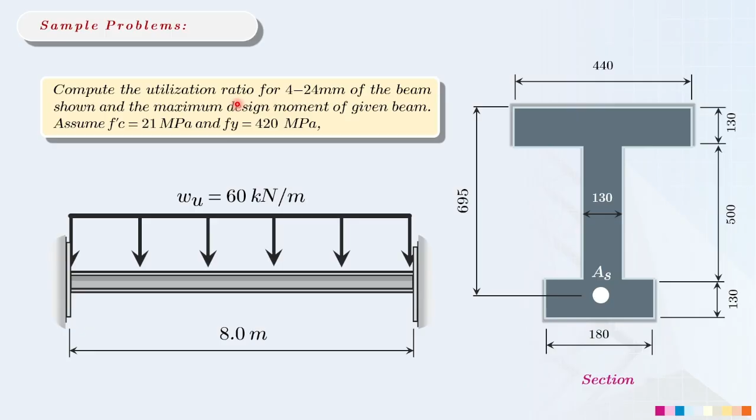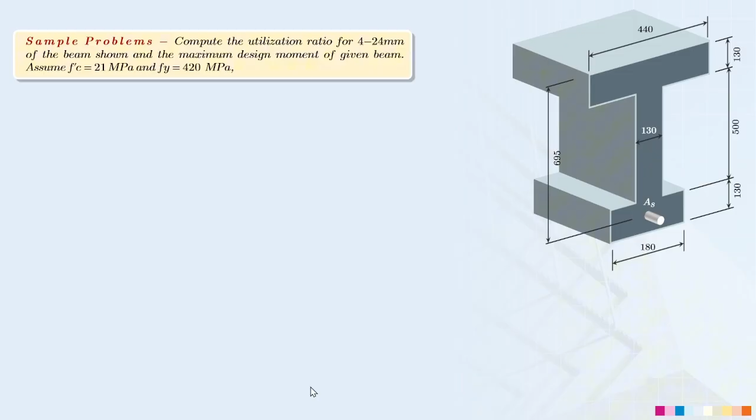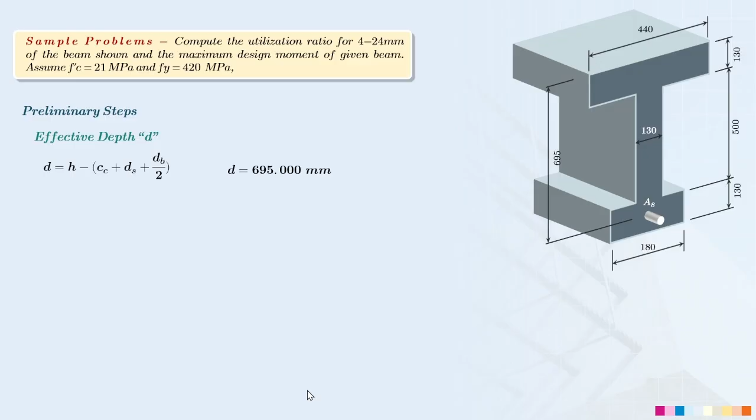So first, let's find the section capacity of our given beam. Our preliminary steps: we need to determine first the given effective depth. It's clearly stated in our sample problem that our effective depth is equal to 695 millimeters. However, the next preliminary step to consider is the area of the compression block.

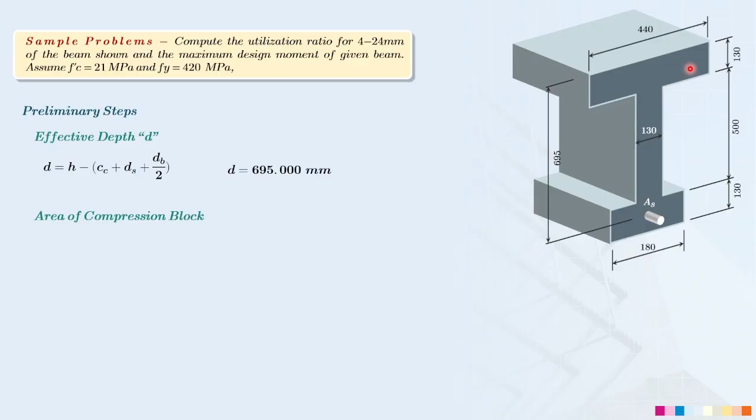Since our figure has an offset dimension, our section is composite in shape. It's possible that it falls under case number 1, where the value can be less than the 130 millimeter offset. If that happens, to get the area of the compression block, you simply use the area of a rectangle, which is base times height, or in our figure, 440 times A.

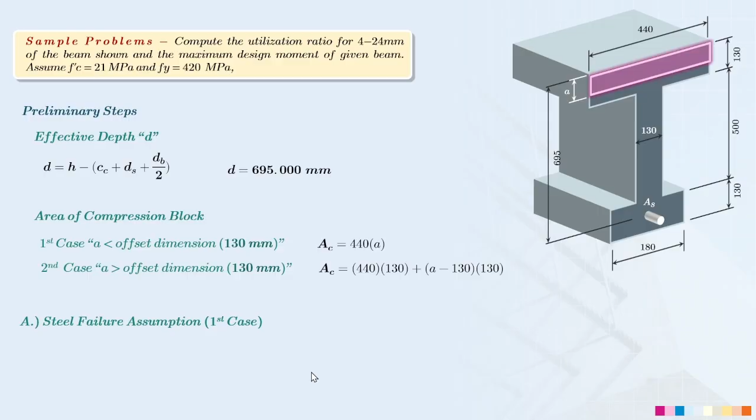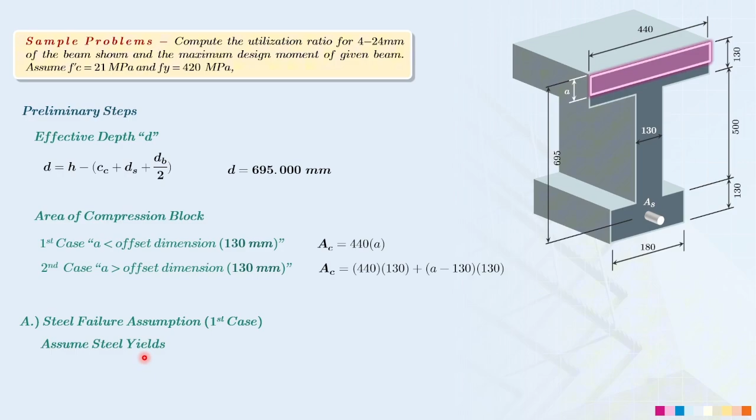So let's proceed with our first step, which is to determine the assumption for our steel failure. I will assume that my steel will yield, meaning my rebar strength can be greater than or equal to Fy. Our Fy here is 420 megapascal, so I will assume this value.

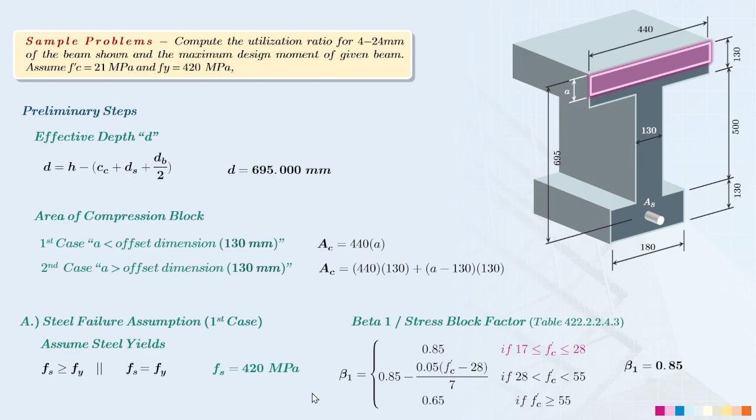For my beta 1, or the stress block factor, this is dependent on the value of our F'c. Our F'c here is 21 megapascal, so our beta 1 is equal to 0.85. Now we have our assumption for steel failure.

So in terms of my compression block, what I'll assume now is case number 1, meaning the a will not exceed 130 millimeters. So the next thing we need to do to incorporate our first case is...

I will now use our equilibrium compatibility, in general for our non-rectangular sections, and then substitute the area of compression block we derived for our first case, assuming that our steel will yield.

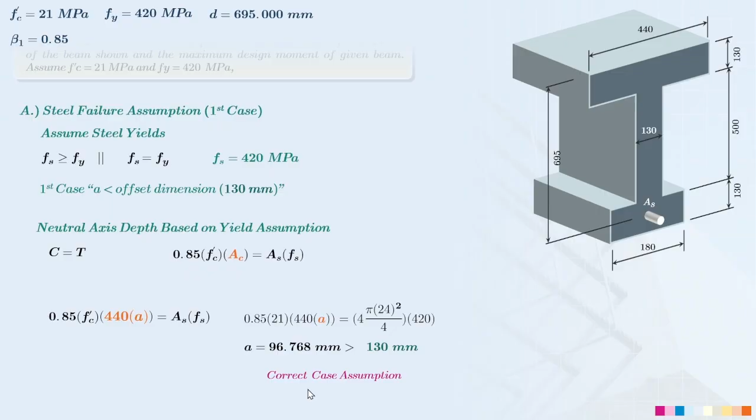So we substitute the other given values that we used here, and we need to solve first what is the value of A. So the value of A under this first case and under this first assumption is now equal to 96.768 millimeters. This means that our offset dimension of 130 millimeters is not exceeded.

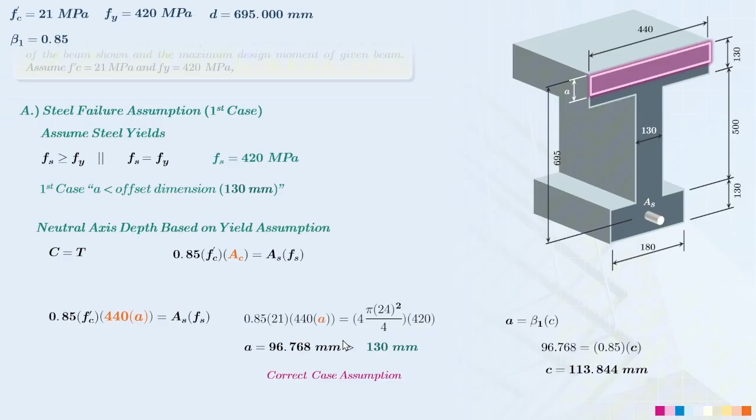This means our case assumption in terms of area of compression block is correct. But we can't finish yet because we need to confirm if our reinforcement will yield under this first assumption. So let's also find the value of the height of our compression stress block, which is equal to 113.844 millimeters, which means this is the correct case assumption.

But first, we need to determine if our value of C will yield as we assumed earlier. So let's do the second step, which is to check our assumption. Using this formula for our rebar strength, we substitute everything we got, especially the effective depth and the value of depth of compression block. So we get our rebar strength to be 3,062.893 megapascal, which is more than 420 megapascal.

This means that what we assumed in terms of rebar strength does yield. This means our assumption for the value of A is correct, which does not exceed our 130 mm. At the same time, our yielding strength or the rebar strength will yield. So what we did earlier was correct.

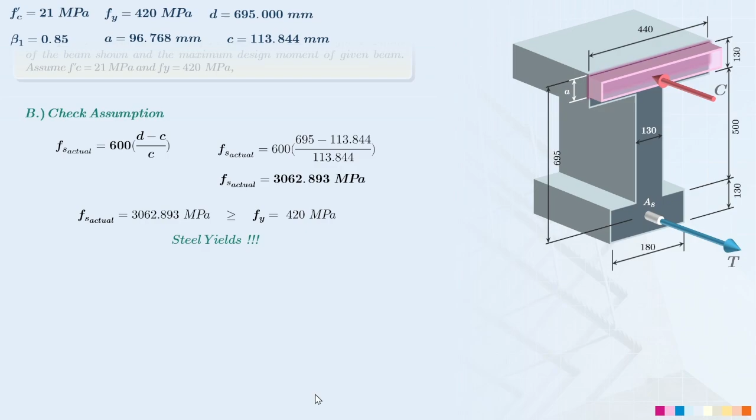So the next thing we do, if our conditions are correct, we can now determine the strength reduction factor. Under this condition, we compare our rebar strength between 1,000 and 400 megapascal. Since our rebar strength here is 3,062.893 megapascal, this is also greater than 1,000 megapascal, so our strength reduction factor is now equal to 0.9.

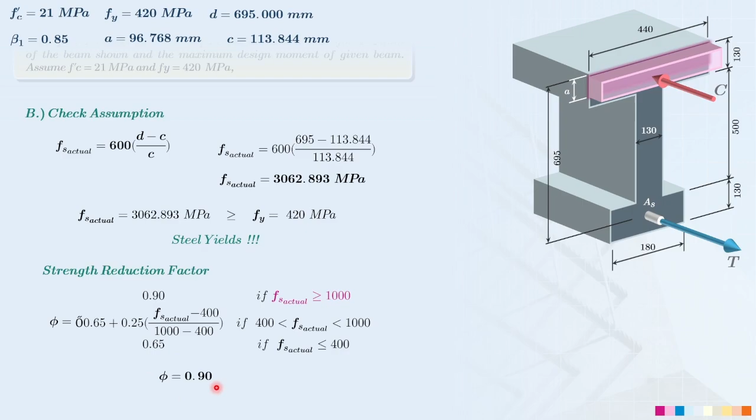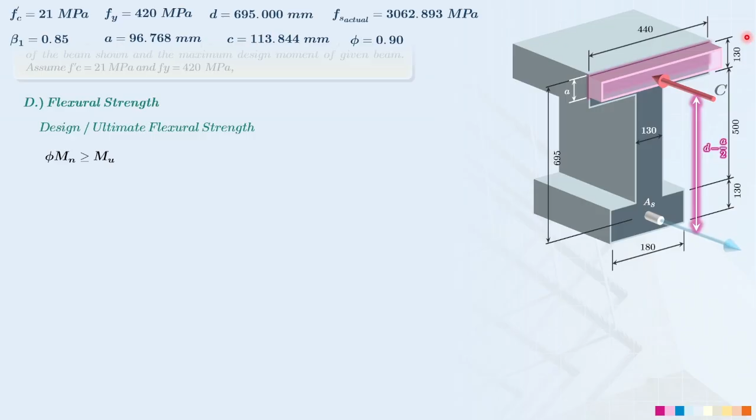Now let's proceed to our flexural strength. The nice thing about our formula for flexural strength is that our area of compression shown here is less than 130 millimeters in height. This means that for our formula, especially for the area of compression block, we don't need to split it into two. As you can see here, this is also a one piece area of compression block, so we don't need to divide it into two.

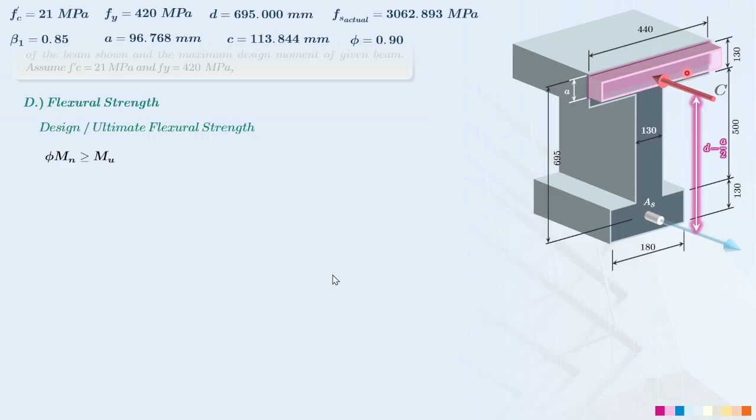So this means what we used earlier for the assumption for our area of compression block will just be used later on in our substitution. So this is the ultimate strength for our given section. Obviously, this is applicable to our rectangular sections. That's why if you notice here, especially in this moment arm, what I did was just utilize A over 2.

So let's substitute again our other given values, or let's just expand this properly, so we can get the value for our ultimate flexural strength, which is this one. So we get our ultimate strength or our moment capacity here to be 442.294 kilonewton meter. We're not done yet because we still need to get our moment demand.

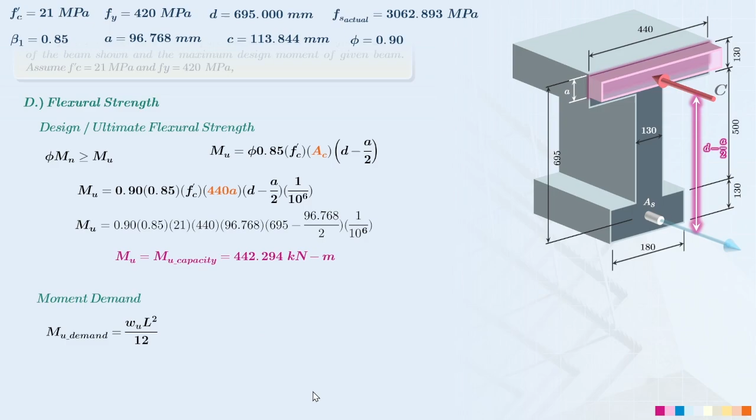So for our moment demand, since our given here is a fixed support beam with a uniform load, we will use this formula in determining our maximum moment. So let's just substitute directly. By the way, our uniform load here is already maximum, that's why we don't need to use load combination anymore. So anyway, our maximum moment, which will be our demand, is now equal to 320 kilonewton meter.

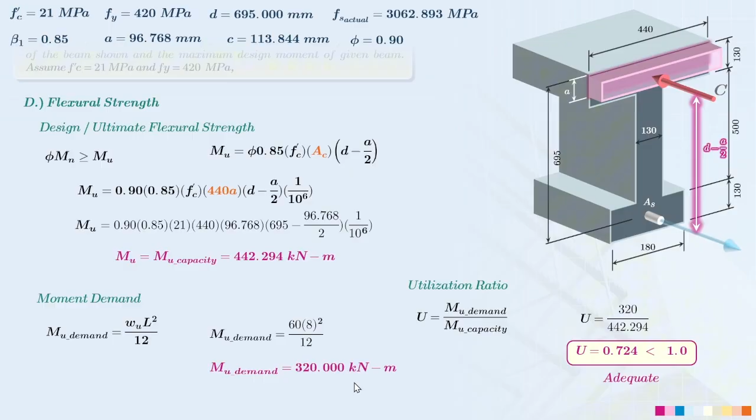This means we can now use the utilization ratio, which is demand over capacity. Let's substitute once again. So what we get now for our utilization ratio is equal to 0.724, which is less than 1. This means this is adequate. So this is our sample problem for the analysis of non-rectangular sections.